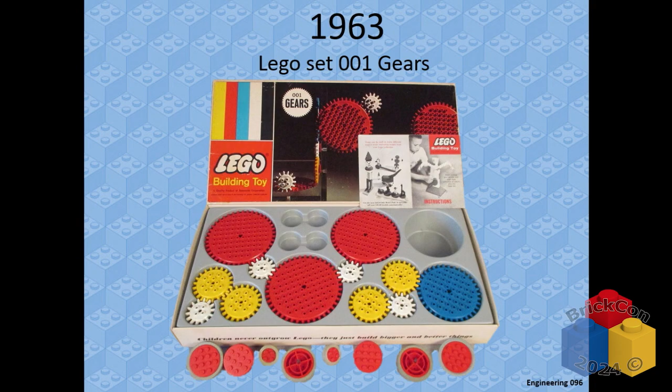So this is low-level engineering stuff, real quick. Gears have been around in Lego form since '63—the big sprocket ones, those are kind of fun. And in '77, that's when Lego came out with what we now call Technic. That's when we got the 8-tooth, the 24-tooth, and the 40-tooth gear. More on those later, but they've been around since the '70s, okay?

Some of you have been around since the '70s. Yes, there we go, excellent. So I do remember when these kinds of things came out when I was a kid, and that was kind of cool.

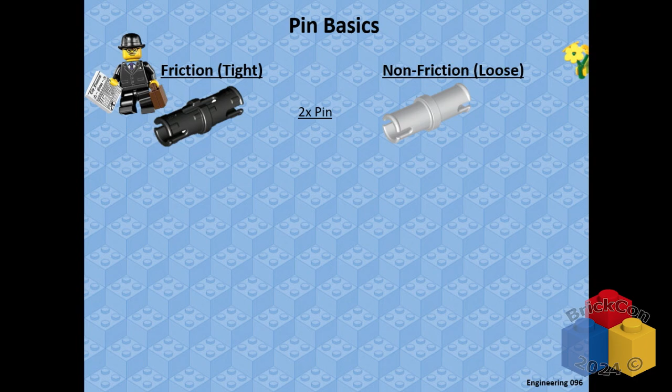So pin basics, real simple. If Technic is not your area, there's friction pins—they're a little bit tight-wound. And there's the non-friction pins, which are really kind of loosey-goosey. They are different, I didn't learn this till I was in my 40s. I always thought they were the same, just different colors. Working with gears, the ones that are a little bit more helpful are the combination pins.

Where it's half axle, half pin—sometimes you need to connect a gear to something, but only to the Technic beam or something. So the non-friction tan ones are very convenient for that because they spin nice and loose. Sometimes you need to introduce a little more resistance in a mechanism, and the blue ones can be nice because they will still attach to the gear, go into the pins or the beams with the pin connection, and have a little bit of resistance and friction. Just a little tip there.

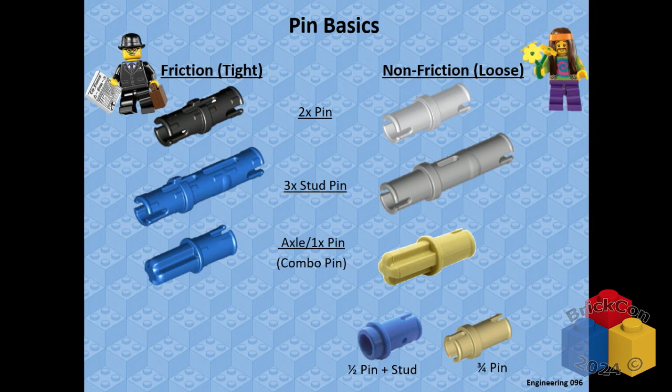There's more pin types if you don't know them, even more than this, but basically think friction and non-friction. The friction ones are all black and blue, the non-friction ones are all tan and gray. They also have red and yellow that they're introducing now, which is frustrating because I learned these colors—but they do still follow the friction, non-friction rule.

In general, simple machines—this is the core alphabet of all mechanical engineering. If you don't know these 6 simple machines, find a resource to help understand them; great YouTube videos and tutorials out there, lots of fun stuff. This is great for understanding how machines work. The basic concept is changing the magnitude or direction of a force—make something go a different way, or at a different speed or force. There's lots of math you can do with these things.

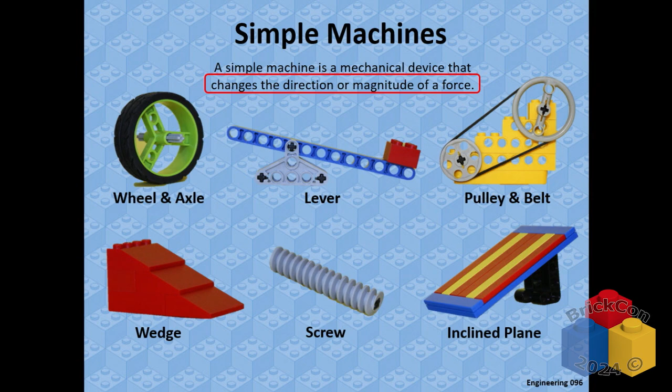That's not why we're here, so we're going to just focus on the fact that they're cute little things and they do stuff. So, simple machines—get to know them, maybe that's a talk for another day. Any kind of simple machines combined together make a more complex machine, like a gear. A gear is not a simple machine, it's more complex—it's got more functions in it, and we're going to use those to do stuff.

You just passed 096. On to 101.

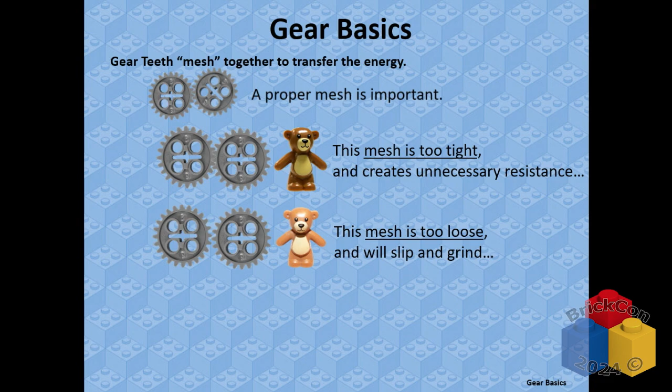Gear basics, just learning about gears. You never touched them before, you don't know what they are, you find them in the bulk bins, you're like, it's weird. Got to have a proper mesh. When they mesh together, the teeth of the gears really need to fit properly.

Can't tell you how much I see with, do you not fit properly sometimes? Does it not mesh right for you sometimes? Okay, I'm sorry, that's a personal issue. We'll talk about that later.

It's okay. So make sure they're not too tight, make sure they're not too loose. They got to fit just right. That's kind of cool.

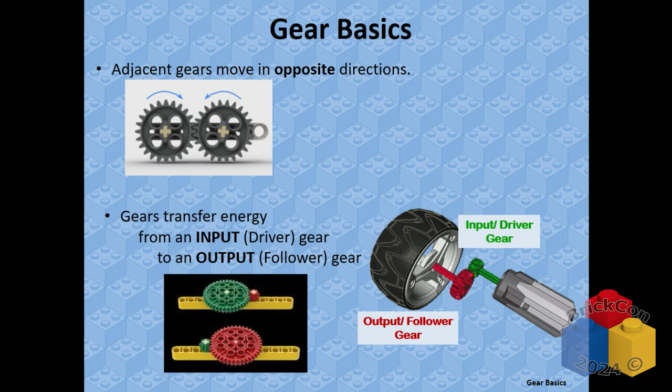Two gears working together turn in opposite directions. It seems pretty logical, but sometimes we forget that. You build a thing, you hook it up, you turn it on, and it's like, why is it going backwards? Well, because you got two gears. Maybe make the first one go the other way, and the other one will go the other way.

Gears always have an input gear or a driver gear. That's where the thing is going in, you're starting the force there. It connects to an output gear where it's going off to do something else. Input and output, first, second, driver gear and follower gear. Different terms, but input, output. Easy enough, I hope.

Gear basics. Any time you want to put a gear between gears, you can do that. You still have an input, you still have an output, but you can put some gears between them if you need to space them farther apart. Those are called idler gears. The idler gears space things out. One idler gear will reverse the direction, so now the input and output will go the same direction. But if you put two idler gears, now they're going to go back to opposite directions again. You can put a whole bunch of idler gears together and it creates a gear train.

Using smaller idler gears can create some resistance and friction. Using larger ones gets you farther spacing and makes it a little bit smoother. Depends on the machine you're working with, but idler gears can be your friend to move things farther apart. Idler gears do not affect gear ratios, which we'll talk about shortly. Don't freak out on that word you heard back in middle school. They do not affect the gear ratio, just the input and the output.

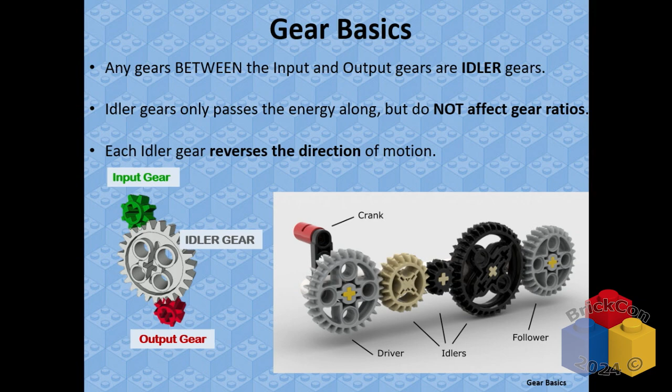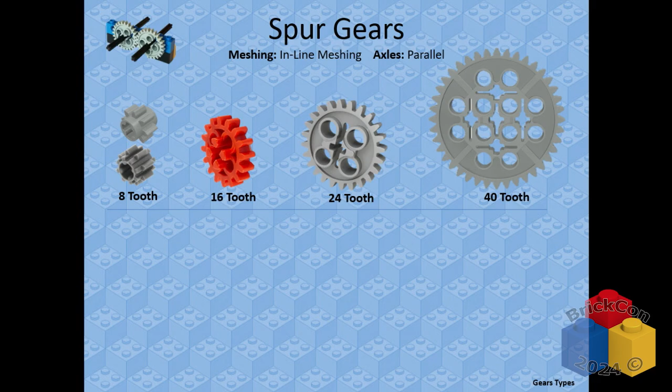On to gear types, gear pairings. I'm going to go through this quick, and then we're going to get to the more meaty stuff, hopefully. If you're using gears and you want the axles to be in parallel with each other, you got gears that are just meshing side by side, sitting right there. That's an easy one. They're called spur gears, you know, spurs like a cowboy. Yeehaw, giddy up, little cowboy. You got an 8-tooth, 16-tooth, 24-tooth, 40-tooth. That's it, those are your spur gears. Seem easy? Freak anybody out yet?

You don't even want to answer because you're freaked out. Okay, so I'll just move on.

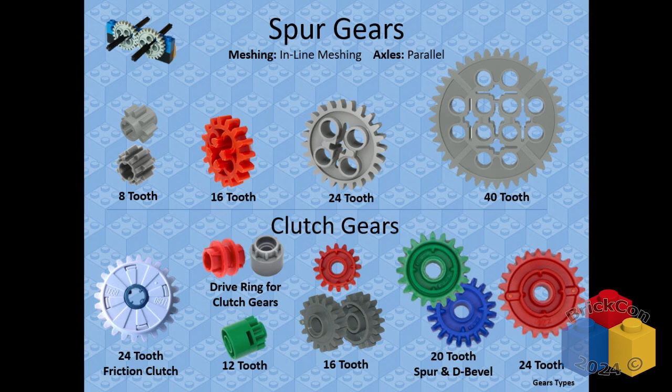So clutch gears are kind of cool. The white one on the end is an older one, but still's out there. The center axle hole can move independent of the outside. So if you put an axle in the middle, connect a gear to it, there's enough resistance in there that it will turn. But if one side, the inside or the outside, jams up or slows down or encounters too much resistance, the center one can spin independent of the outside one, so it slips like a clutch. That's why they're called clutch gears.

All of the other ones up here are more for transmission drives, like in some of the really fancy Technic cars and things. You actually want to do a gear transmission where you might have one gear spinning constantly, and then you want to take this other gear, move it over and engage it to make it start turning, or shift it to another gear that engages with it and starts moving. So clutch gears, good for moving and making transmissions.

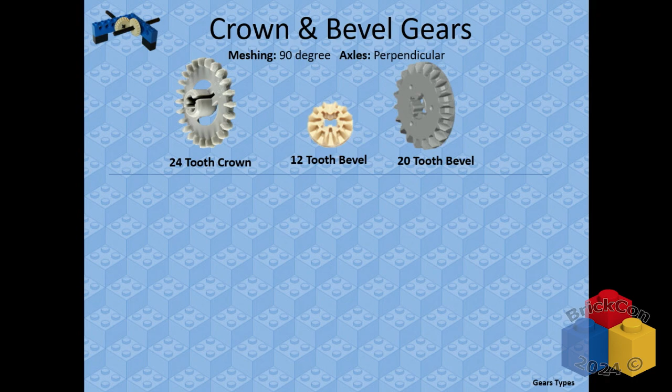Changing axle direction, going perpendicular. Maybe your motor is connected to something this way, but you want something to go in a different direction over there. We can do that with a different type of gear that'll change directions: crown gears, beveled gears, to change axle directions and make perpendicular axles, like going around a corner.

My friend Kyle Keller showed me that you can even put them on a 45-degree angle. It gets really weird. It's really cool, but it's kind of challenging.

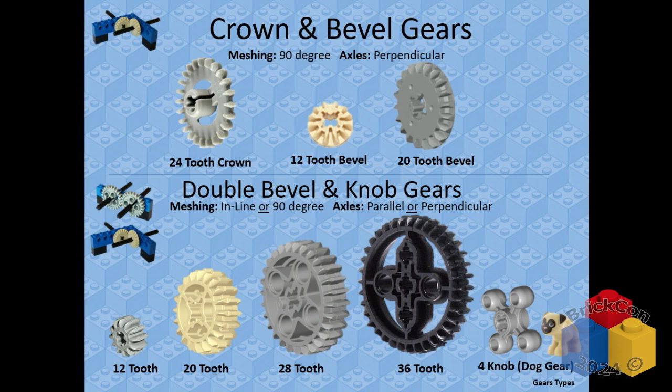The little wheel one at the end, the knob gear or dog gear, does the same kind of thing: inline or 90-degree meshing. So there's all the basic gears, with gear sizes right there. There are 8 different sizes of gears across 3 different types. Pretty straightforward.

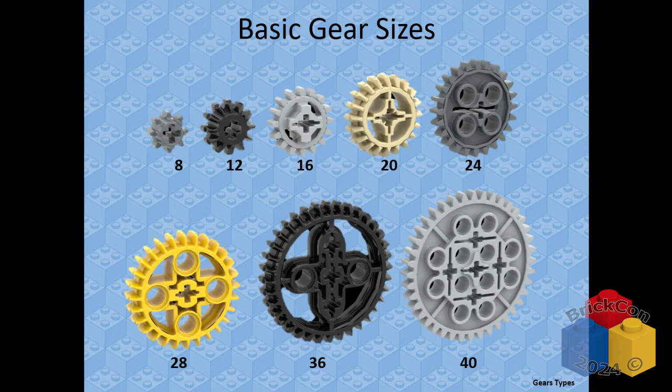Do you remember those all? No, I don't remember. It took me like 3 years to start remembering the numbers and things. If you don't remember the numbers, don't worry about it. There are resources to figure it out, or you can just sit there and count each tooth on a gear. It's pretty easy, pretty cool. But knowing the numbers eventually helps you do more advanced functionality with it.

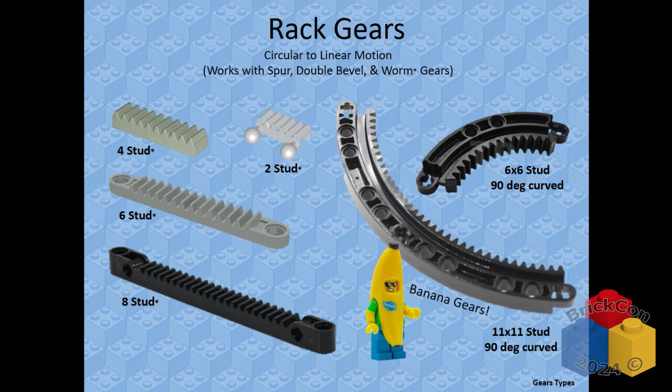Rack gears are a different type of gear. They're not round, they're linear - flat and straight. Good for going in a straight line, making linear motion. You can take a round gear, connect it to a linear gear, and go back and forth.

The banana gears, the big curved gears, are totally cool. You can make a complete circle, or use them as a quarter circle, half circle, or three-quarter circle. But they're curved on the inside - a little bit different there.

The worm gear is one of my favorite gears. It's a one-tooth gear - all it's got is one tooth. But it's really great for slowing things down and giving a lot of torque, which we'll talk about shortly.

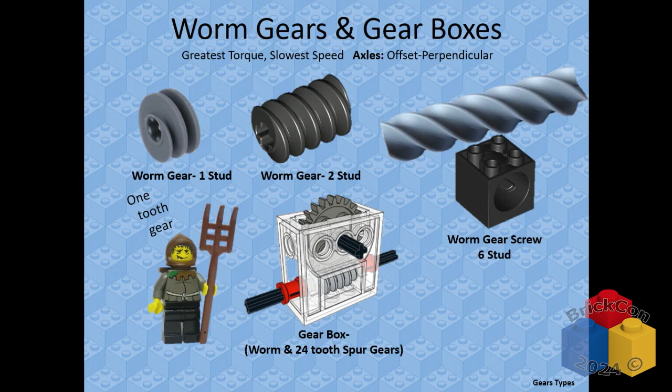There's this little clear gearbox, which comes in other colors, that works with the worm gear and the 24-tooth spur gear - it just fits in there and works. You can use Lego pieces of other types to make that same connection so the gears work together, or there's just a piece that does it for you. Both are okay, no judgment there. And they're still available.

Differentials come in all shapes and sizes through the era. If you're doing like a car with a transmission and you want the back wheels to turn faster than the other, a differential is your friend. But it could be used in other mechanical things as well. It's a much more advanced engineering topic that I don't want to get into today, but I want you to know what's out there.

The turntables - the inside spins separate from the outside. That's pretty easy, and you can hook a gear to those to make them go.

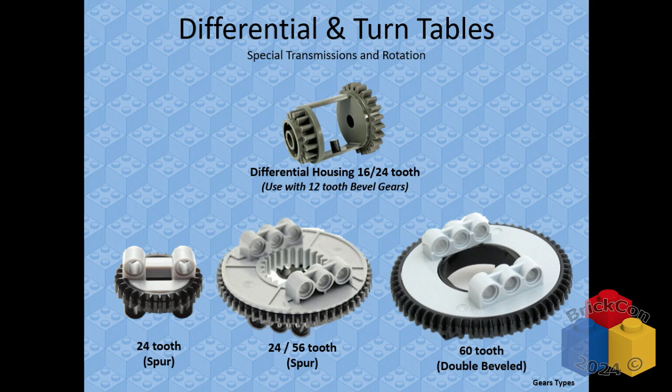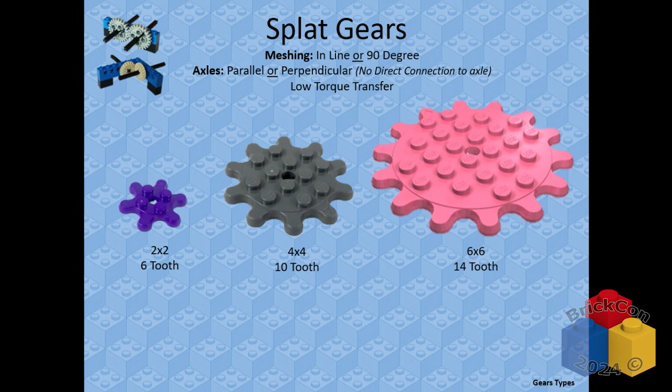Easy, right? No? Okay, good. So if you want to hook them together and make them work, there are certain ones that work together and certain ones that don't.

If you want to use any of the spur gears, all the spur gears work together, but they also work with the crown gear and the double bevel gears and the rack gears. Okay, easy enough, little Venn diagram. Does that visually work? Good, okay, good.

Somebody nodded. If you want to use the double bevel gears, all the double bevel gears work together. Very cool. But you can also use the regular bevel gears, and you can use the crown gears, and you can use the spur gears, and you can use the rack gears. Okay, that's kind of cool.

If you want to use the worm gear, it has to be the input gear, it cannot be the output gear. It's a one-direction connection. You drive the worm gear with like a motor or something, and then it makes another gear move, but you can't go the other way. You can't turn this 40-tooth gear and make the worm gear go. It won't work. Just mechanically, it doesn't work that way. So worm gears, one direction only.

And they only work with these guys. They don't work with the banana gears, even though they're in my circle. I don't know, I got lazy. I didn't want too many circles. So don't use them with the banana gears. It's curved and the thing's not, and it gets really funky and weird. Okay? And of course, the knob gears and the splat gears, they work together as well also.

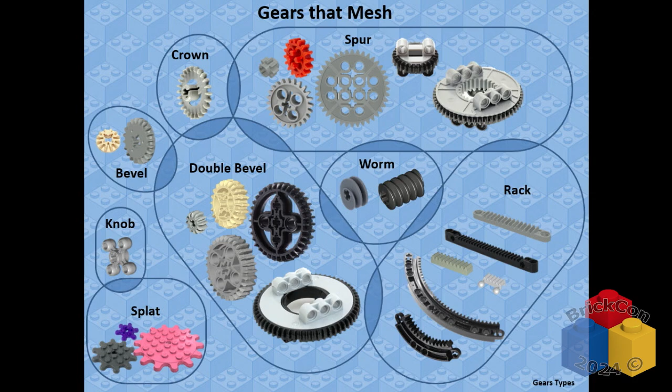All right, so that's gears. Speed versus torque. Does that scare anybody? Some people say no, some people say yes, okay good. So speed is obviously something moving at a quick rate. Torque is a twisting force. If you reach out and grab a doorknob and twist, that's a twisting force, okay?

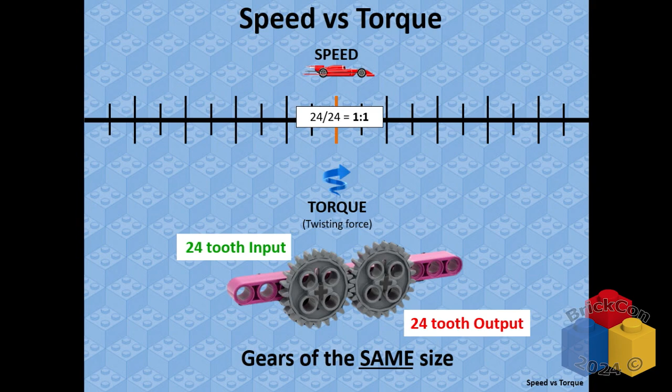Something that twists, how much twisting force is there in there? That's torque. So if we have two gears working in a simple system here, and the two gears happen to be the same size, like these two 24-tooth gears. Got a 24-tooth gear input, got a 24-tooth gear output. Okay, so every time the input gear turns one time in a circle, how many teeth went around that circle? 24, for the half of you that understood that.

That's good. And that means that it's going to push on the output gear how many teeth? 24. So it has 24, so it's also going to go in a circle one time. So they're going to turn around a circle at the same time, at the same speed, with the same amount of torque. It's a balanced system. If it was an 8-tooth gear to an 8-tooth gear, they would both turn at the same speed with the same torque. 40-tooth gears would turn at the same speed, at the same rate, at the same torque. Same size, same input, same output, same speed, same torque.

But the beauty of the gears is when we change one of them. So if the input gear is a little bit bigger, like a 40-tooth, and the output gear is still a 24-tooth, the input gear is going to turn, 40 teeth go around. How many teeth does it have to push on the output? 40 teeth have to be moved, but there's only 24 teeth there. So it has to go around and it has to go a little bit more. It's like, okay, hold on, I gotta catch up to you. Hold on, 40 tooth gear, I'm not there yet. So it's gotta go a little bit faster.

When that happens, speed and torque are inverse opposites. So if speed goes up, torque goes down by the same inverse amount. If the other goes up, the other goes down. So they're gonna move at the same rate. So we're gonna gain a little bit of speed, but we're gonna lose a little bit of that torque. That make sense, everybody? Okay good. I did something right. Coolness.

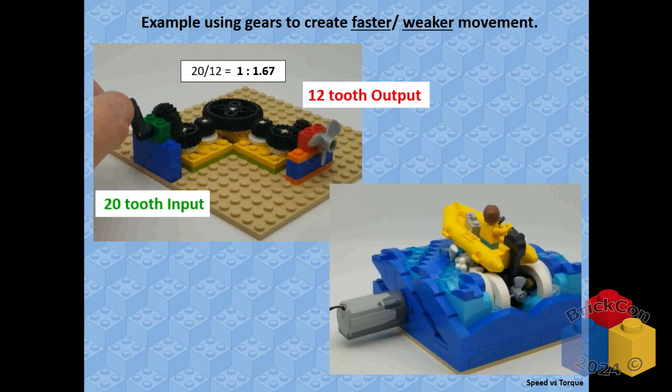Okay, so here's an example. You probably saw this down there. My little speedboat. I wanted a speedboat, so it had a really fast propeller. So I have an input gear hooked up to a motor down in the hull. 20 tooth input gear, and a whole bunch of idler gears. A lot of idler gears.

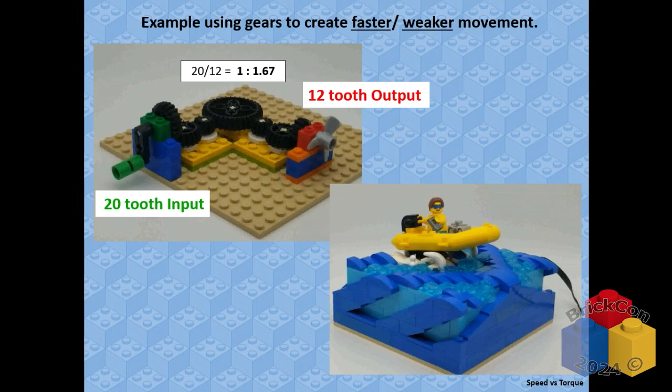How do I factor in the ratio of the idler gears? It doesn't matter, you ignore them. You ignore every single idler gear. You look at the input gear, the first one, and then you look at the output gear at the end. Because every time that input gear turns and pushes 1 tooth, the next idler gear pushes 1 tooth, and the next, all the way to the end. And the size of the final one, the output, that determines your gear ratio. Input, output. Ignore the rest.

They don't matter. So here we got a little bit of a gear ratio to increase the speed, to make it go a little faster.

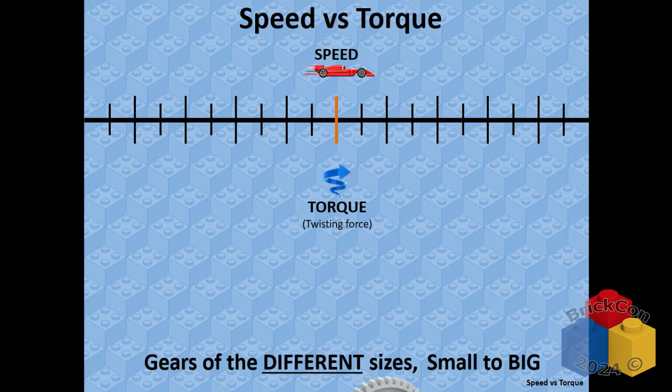So, but what if we change it the other way? We're like, I like that, Brandon, but I don't want that, I want the other thing. Okay, so we can go smaller gear pushing a bigger gear. Same concept, just in the other direction, because inverse opposites go the other way. So now I can get less speed because I want to slow it down. I don't want it to go fast, I want it to go slow.

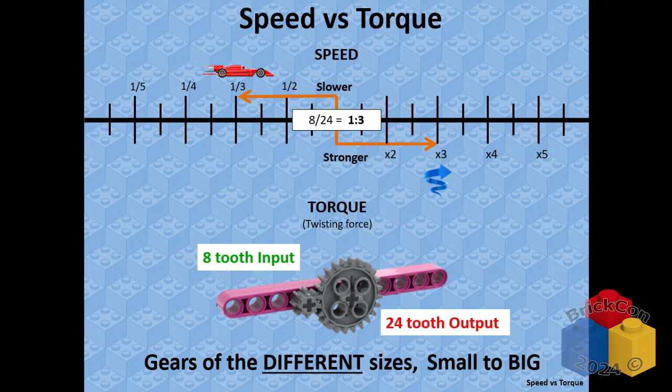We can do that. Okay, it's going to have a lot more torque, though. And if we go from an 8 tooth to a 24 tooth, okay, I got 3 times the torque. A lot more power. A lot slower, though. Okay, that could be cool.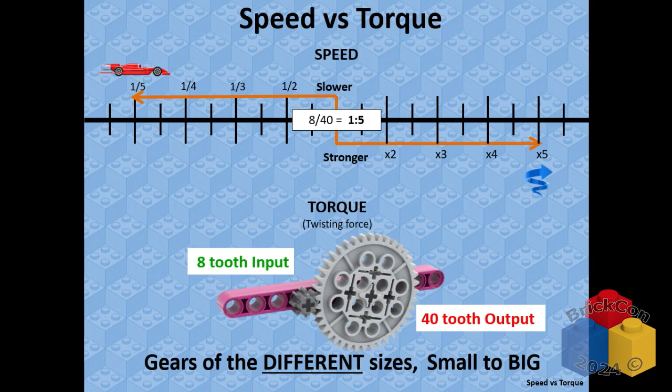And if I want to go from an 8 to a 40, then I've got - it's math. Do you see how the math is kind of working there? Remember, it's ratios, they taught you ratios at one point in school. I'm sure they did. So we get 1/5 of the speed, but 5 times the torque. Maybe you want to lift a big bridge or move a big thing. Okay, maybe you need a lot of torque. That's kind of cool.

How does that feel for everybody? Not too bad? Some people are like, and some people are like, what? I need to take this class again. Hopefully it'll be available for recording later.

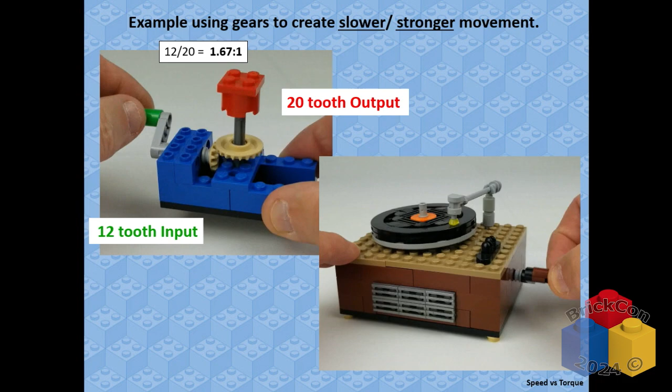So, example of gearing something to go slower. Slower but stronger. Here I've got a 12 tooth input, 20 tooth output. So it's not a lot of change, 1.67, it's not too bad, but it gives me a little bit of difference there.

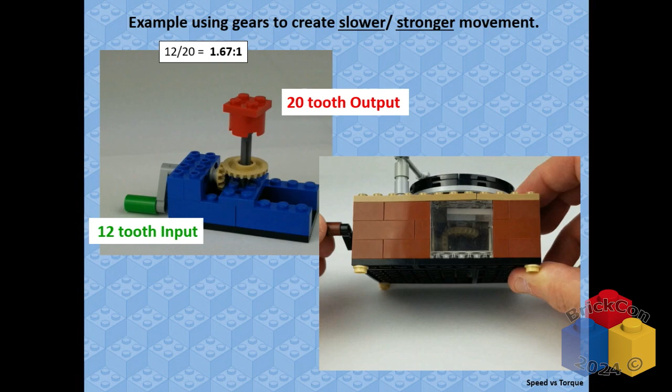And there's my little record player. Who saw the record player down there? Oh, somebody saw my stuff. I'm so honored. It's so cool, so cool. All right, let's move on.

Now, here's a bunch of gear ratios. That's kind of a lot of information. This is online, you can find this, I'll show you where to get it here in a bit. But if you took an input gear of an 8 tooth and an output gear of a 24 tooth - input is green, output is red - and you cross-reference them, you get a 3-to-1 ratio. Okay, that's cool. If you go the other way, you're like, well what if I want the 24 as the input, the 8 as the output? 1-to-3 ratio. Just a matter of whether you're getting speed or torque.

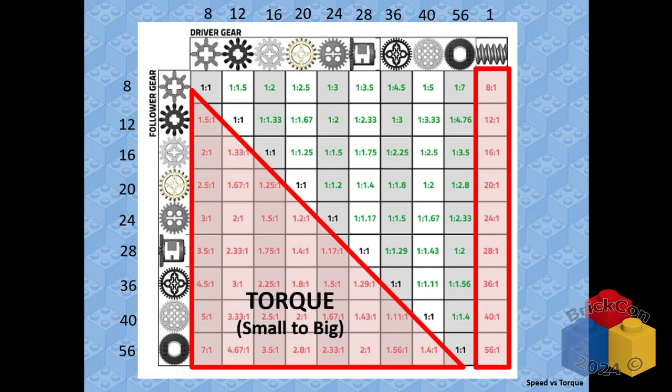If you use the same size gears, what happens? Same, 1-to-1 ratio, so long as they're both the same. Okay, but you can figure things out and do speed, or you can do torque. And worm gears have to be which gear? Input. Got to be - you guys are good at this, I love it. Okay, all right.

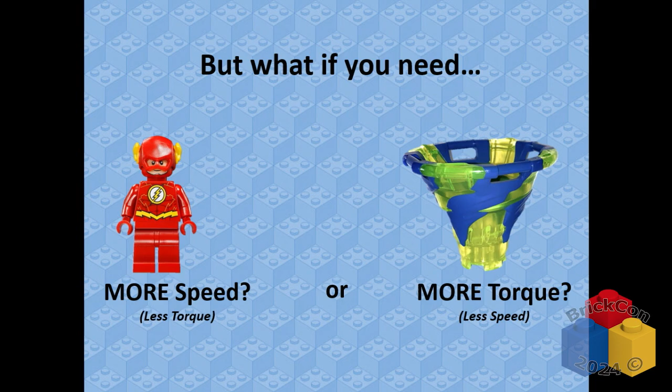But what if - more speed or more torque? Tornado of creation there, for those of you Ninjago fans. Kind of, not really, I just figured it was something. So when you do compound gearing, who's ever done compound gearing before? Okay, you guys are good to go. No.

Okay. So compound gearing, not too complex, but it's like it sounds, compounding. We're going to do it. So we're going to do an 8 to a 40. Does that feel kind of comfortable now? And we get a 5 to 1, so we're going to get a little bit more torque. And we're going to go a lot slower. Really slowing this thing down by 1/5. Okay. You can say 5 times slower or 1/5.

I don't care. Okay. But then on that output axle, the same axle that your output is at, you're going to add another gear. And that's going to become a new input gear. And that's going to go to a new output gear, which gives you another 5 to 1 ratio. That's kind of cool. But the total, the combined from the first input to the last output is not just 5 to 1.

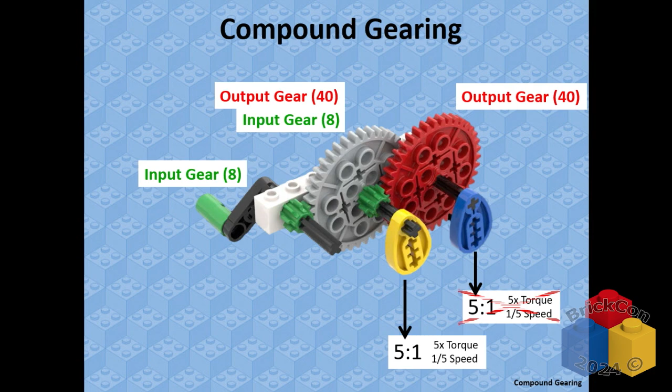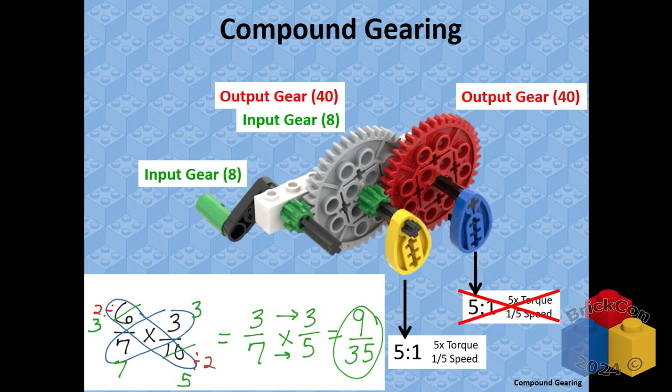You've got to do some really great, they taught you this, right? How to take two things and divide and then cross over and do this and then divide by the opposites, and then you remember that? Do you remember they showed you that? Yeah. It's 5 times 5 is really what it is. So 5 times 5, we get a 25 to 1 ratio.

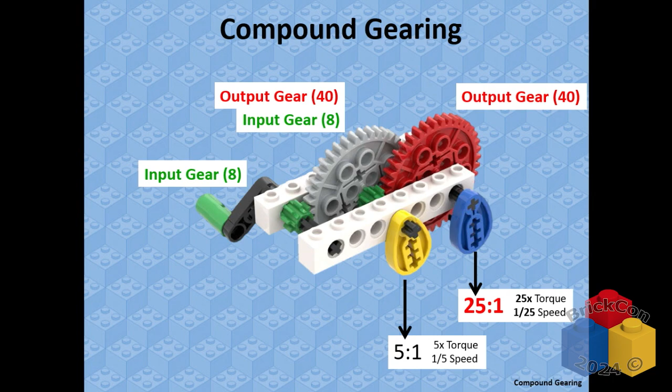So I did it once, I did it twice, I compounded it. I now have something that's going to go 1/25th the speed, or 25 times slower. It's going to be very, very slow, but it's 25 times stronger than whatever my input was. That's a lot more torque. You can start twisting axles at this. I've done that. I've taken axles and twisted them 180 degrees against themselves. And they're really cool, but not fun for the MOC, I tell you that.

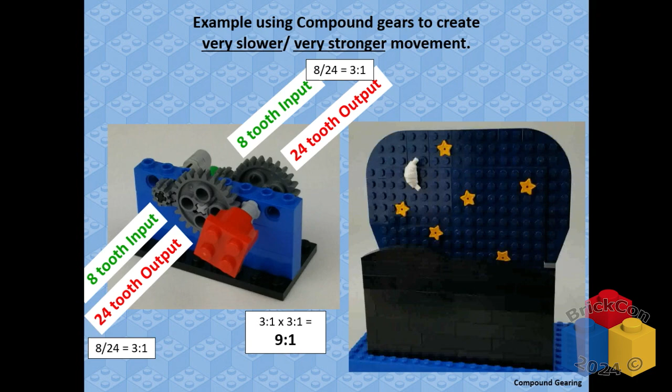Okay? So here's one where I did compound gearing, the little shooting star thing. Maybe you saw this down there. It's got an 8 to a 24, and then another 8 to another 24. So I got a 3 to 1 and a 3 to 1, 3 times 3, 9. Okay, just move over this way. We'll just...

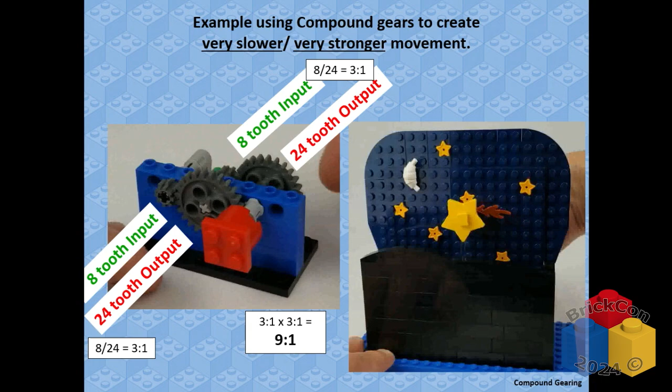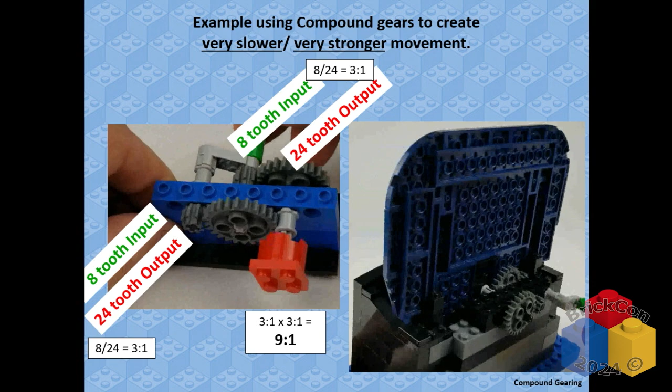Okay, so I get nice slow motion, really slow. Do I need a lot of torque here? It's a really light thing. There's almost no resistance to it. I don't need the torque, but I wanted it slow. I was able to slow it way down and give me the speed I wanted. And if it was not the right speed, I could change some of the gears around and combine them differently and get different stuff. Okay?

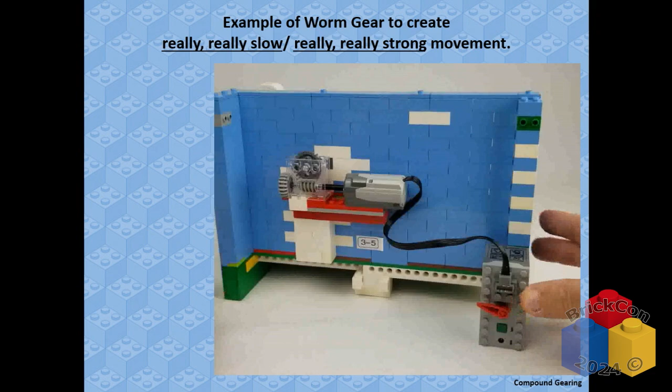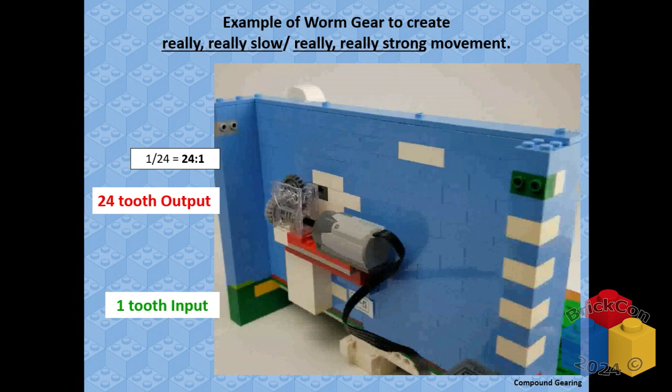This one uses the worm gear. And so you got a motor going into a gearbox. There's a worm gear at the bottom. There's a gear on the end. Ignore that one. That one's just there for manual control, so I can force it if I needed to align it. But a 1-tooth gear to a 24-tooth gear, 24 to 1 gear ratio. Interesting. Okay. So it's going at 1/24th the speed with just 2 gears. The other way I compounded it, I was able to get 5 times 5, 25, 1/25th, or I can get a 24th. Kind of a different way to do that.

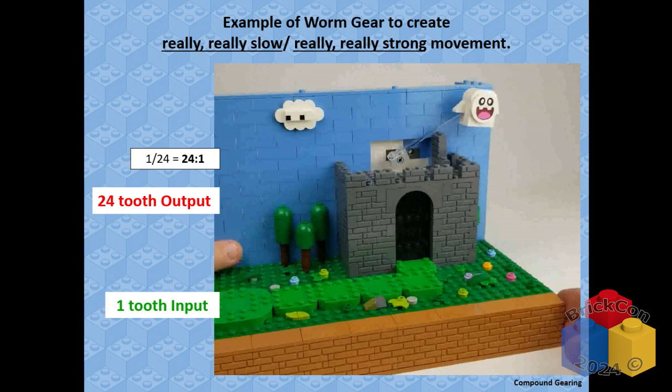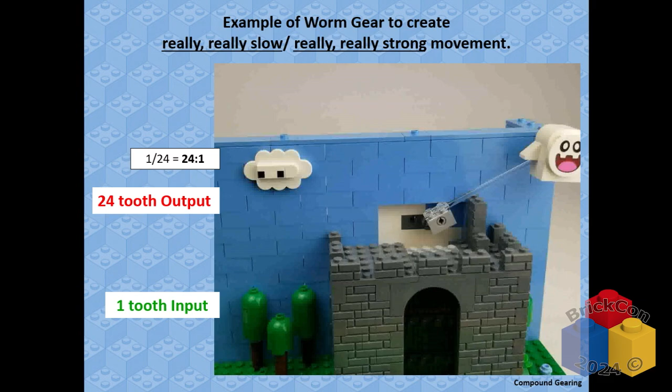And then on the output axle, I just put a little offset beam and attached a pin to it. So that pin in the 1x2 brick is going around a circle, correct? But it's going around the outside of a circle. Going around the outside of a circle is eccentric or off-center motion. So I've got off-center motion, and I just attached a little beam to it, and it's just hanging out there and resting on a thing.

Oh, I'm sorry. They didn't like my talk. That's okay. Get out of here. No. See you next year.

Yeah. So got a fun little motion there. Does that make sense? Okay, cool.

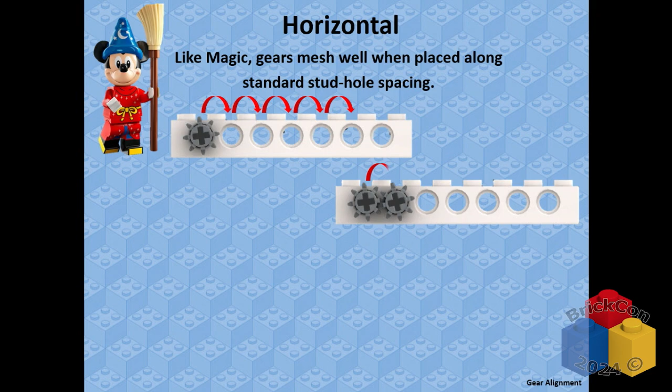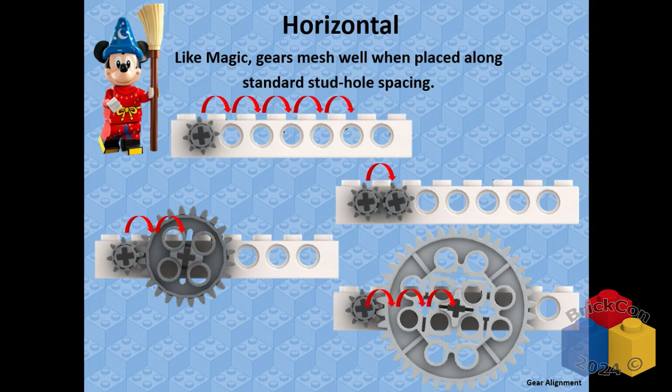Gear alignments. So when you take gears and you put them in those little holes, you familiar with those little holes? Most of you, some of you. Okay, good. Technic. Okay, so they fit in there with axles or pins or whatever we talked about. Okay, and they go next to each other, and the teeth magically mesh in the right alignment, right? Every time. But sometimes they don't mesh. Sometimes they're off by half, and you can't just move it over. You move it over one hole, it's too close. Move it over the other hole, it's too far away. They don't touch. They're cursed.

But we have a way to fix that. Lego's like, dun, dun, dun, dun. We have things that have holes that are halfway offset or aligned with the studs instead of between the studs. Okay? We can do that with bricks. We can do that with Technic pieces. We can move over by half to make up that little bit of difference. Kind of cool.

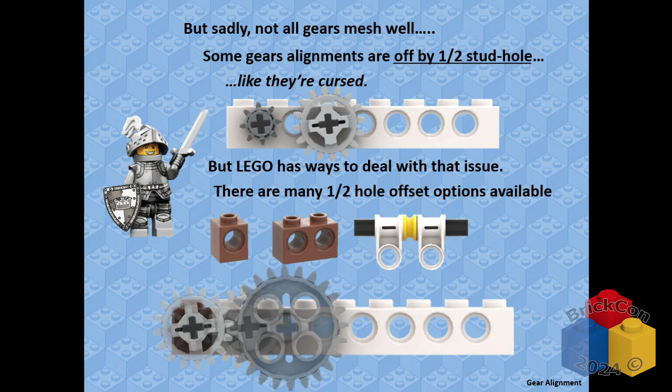So there we go. Now we have good meshing. We can do different sizes. Kind of cool. Anybody encountered that before where you had to move something over a little bit? Oh, yeah, we know we have. That's good. Okay, that's cool. So to help you with that, there's this easy-to-reference chart, right?

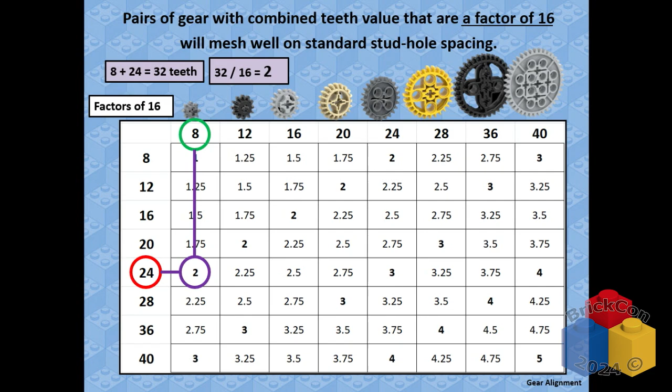Okay, so if you take an input gear and an output gear and you add together the number of teeth, and then you find out how many multiples of 16 that is, well, 8 and 24, that's 32. That's a multiple of 2 16s. That means you need to move over just one extra hole or 2 holes apart. So anything that's a solid multiple of 16s, they just fit. 16, 32, 48, all the way up. They just fit. Kind of easy.

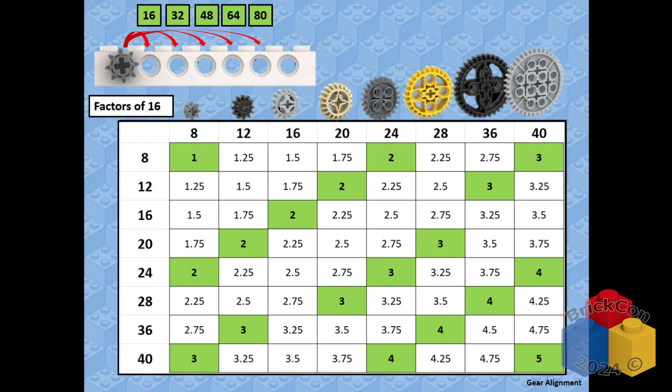Nobody likes to build this way, though. Nobody's digging in your bin and going, oh, let's see, I need to find me a multiple of 16 pair of gears over here so it'll fit into my axle. Oh, yeah, these two. This is a multiple of 16. I know how to work with this. But it's helpful if you start to do some of the calculations. You're like, why doesn't it fit? Okay, we can figure that out, and I'll help you with that.

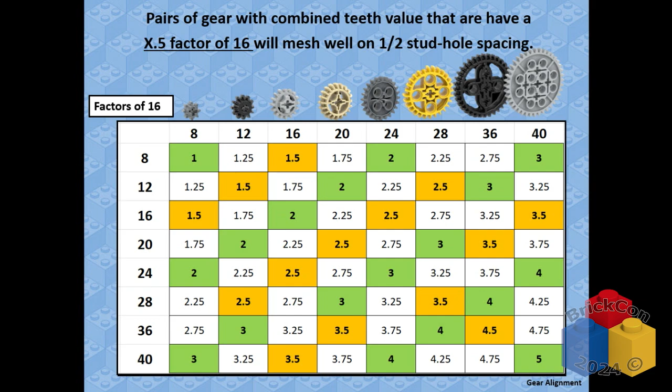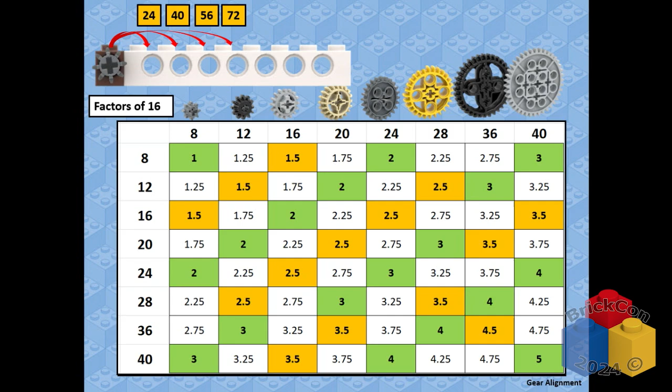Now, if you do your factors and you figure out it's a half of a factor of 16. It's not quite a full factor, but it's a half factor. Okay, then it's going to be off by one of those half measurements. Got to move over half a stud. So not too far, 24, 40, 56, 72. If your teeth add up to those numbers, you're going to be a half. Is that confusing? Good. Okay, don't worry too much about it.

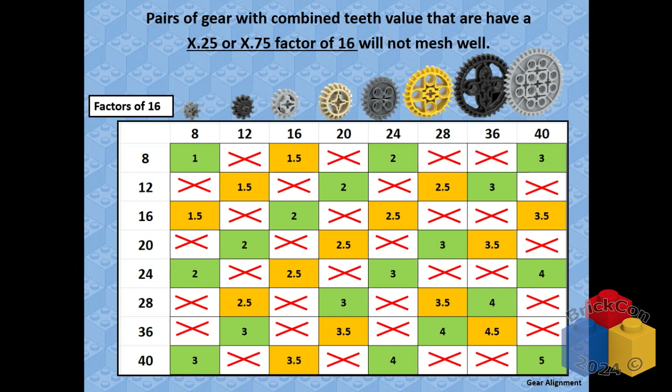But if you do the numbers and you add them all up and it comes out as a quarter or a 3/4 of a factor of 16, those don't mesh. Just don't even try. There's some ways it can be done, but don't hurt yourself unless you're really comfortable with it, okay? So this little chart right here, I'll leave that out so you can take a picture of that if you would like. Or I can email it to you, okay?

If you're going vertically, just taking Technic bricks and stacking them on top of each other does not equal the same as it goes horizontally. Those don't mesh. Don't do that.

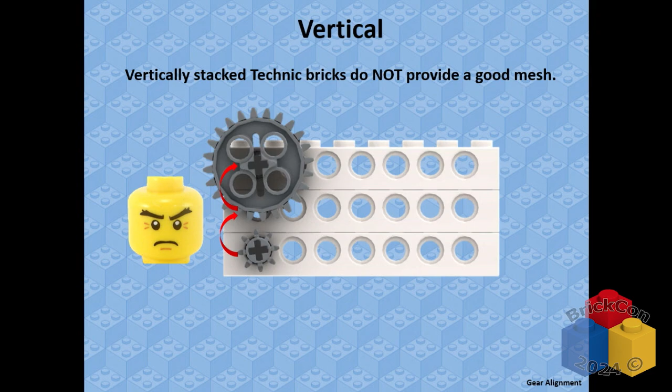I will hunt you down. Okay. Not really. Sorry, edit that out. Okay, thank you. Cool. Okay.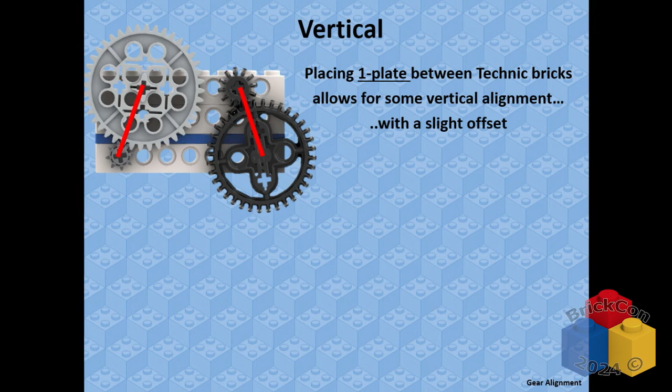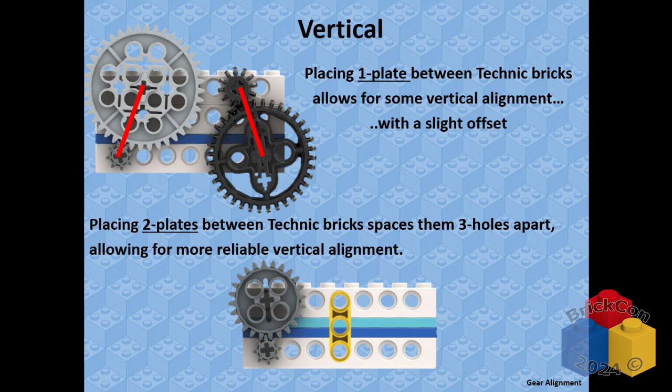But if you add one plate, you can get meshing where the gears are offset by 1 hole or sometimes 2 holes, off to one side. Okay, so 1 plate, that's kind of helpful. Certain gears will fit that way, certain gears won't. But if you had 2 plates between 2 Technic beams, the holes are 3 holes apart, which means it is now back onto standard spacing, which is a really nice technique. And you just get regular meshing. You can't mesh in that middle hole because there's 2 plates there. I don't know who stuck them there, but they're in your way. Okay?

So whatever you want to do with any of your gears, do remember proper meshing is important. There's a lot of other resources out there that can show you some different combinations and different techniques, but generally start there. Go horizontally, great. If you go vertically, recognize it's going to be a little bit trickier. Might have to add a plate or 2, offset them to the side. They can fit. If you put them together and they're too tight, is that good? No. If they're too loose, no. Just right. Make that happen. Sound good? Okay, good. Nobody's learned anything yet. I'm feeling kind of bad.

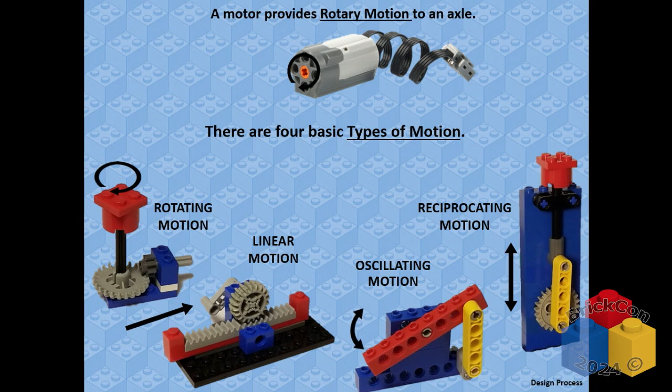Okay, design process. Somebody asked me about this, so I thought I'll throw it in here. So how do I do this stuff? Well, we know that motors, assuming you're using a motor or a hand crank or some sort of an input device, is a circular motion. In this type of engineering, we've got 4 types of motion that you can deal with. You can have more circular motion, but somewhere else. My motor's over here, but I want it over there, but I still want it to be going around. Maybe it's faster, maybe it's slower, maybe it's the other direction. Okay, I want other rotary motion. I want something to go in a straight line.

Okay, I just want linear motion. Go that way. Okay, we can figure that out. I want oscillating motion, swinging back and forth from a fixed point. You're swinging on an arc and you got a fixed point. Okay, that's oscillating motion. Or going forward and back in a straight line, reciprocating motion.

If you're going to build something, think about what you want it to do. Know your type of motion. I want something that's go up and down, back and forth, swing this way, do that way. Know your type of motion. That's where you want to start. Okay? Maybe you want to know what it is. Is it a fish? Is it an alien? Is it a car? But what kind of motion is it going to go for?

Okay? Then, how are you going to get the energy or the motion from your motor or your input to where you want it to go? Well, you got to move the energy from one place to another place. So we got 5 different drive type options in the Lego world. Well, there's pneumatics, but I ain't doing pneumatics right now. You put that on the list, I'll do a talk on pneumatics.

So direct drive, just stick it on the motor and make it spin. Well, we're doing gears, and that doesn't really require a gear because it's just going to spin. Okay, that's just direct. That's easy. But you can use gears. We just talked about that. You remember? We talked about that, using gears to connect together and mesh? No. Wow, okay. Or gears that go around a corner or 90 degrees, they mesh, and you change direction. You still don't remember that. Oh, my God.

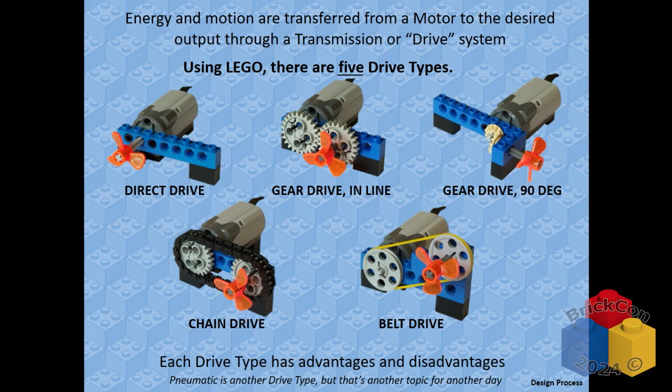Okay? Or belt drive, it's kind of the same thing, but it's a little more elastic, it's a little more loose, a little more flexible. You do some different stuff with that sort of a drive system. Okay? So different drive. Know how you're going to get the energy from one place to another. That's your drive.

So design engineering process. This is something I teach in all my classes. This is something engineers and architects all over the world use. There's different levels of it, but I broke it down to this. Identify the problem, brainstorm. No, you can read them. I don't have to read them to you. I hate that. People do that on PowerPoints. Right? I may read to you what's on the slide, exactly word for word, so you understand it like I understand it. And you can read it for yourself. You're not that slow. Well, some of you, but okay.

But identifying the problem. What's the limitations? What am I trying to achieve? What's my goal? Okay, that's cool. Maybe what are my constraints? I only have these pieces. Okay, that's part of identifying the problem. I don't have any motors, or I only have this type of motor. Okay? It can only be this big, maybe doing a build challenge. That's part of your problem. I want to make it do this. That's part of your problem. Brainstorm ideas. How are you going to come about it? Design it and plan it, et cetera. Okay? So let's walk through this.

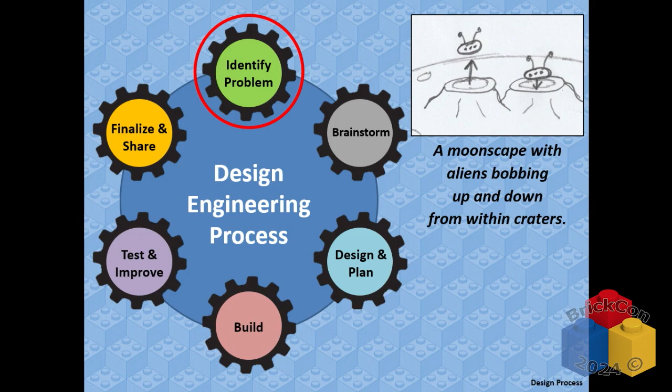Identify the problem. Great. I want some sort of a moonscape that has aliens bobbing up and down out of some craters. Okay? That's my identify my problem. Sound doable? Sounds kind of cool to add to a MOC somewhere, maybe? Like down in the hall, like I have already. Okay, I'll get there.

All right, I'm going to brainstorm some ideas. How can I do this? What's the scale? How big is this thing going to be? Well, I want it pretty small. So I'm going to make my craters maybe 2 by 2, and my aliens are going to fit within that, so they're going to be probably a 1 by 1. Maybe even a Lego head size. That would fit in a 2 by 2 circle. Okay, so that's the size of my crater. That's my scale.

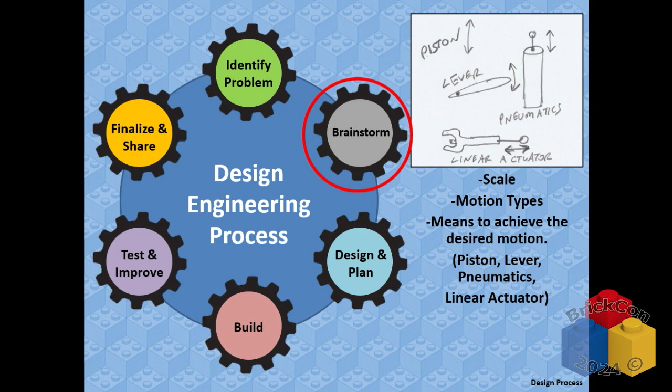What are my motion types? How can I make this thing move? Well, I could use pistons. I could use pneumatics. It would go up. It would go down. That'd be cool. I could use a lever mechanism. It would be oscillating, but maybe the alien kind of comes out in an arc. That could be kind of cool. I could use a linear actuator. Those are cool. I have a few of those stashed away somewhere. If you don't know what that is, Google it. It's a cool piece.

Okay, so I got some ideas. I brainstormed. When you're brainstorming, come up with more than one idea. Don't go, this is what I want, and this is how I'm going to do it. Come up with some ideas. Well, I could do it this way, I could do it that way, I could do it this way. Brainstorm. Think of some idea.

Talk to your friends. Some of you have those. Talk to your AFOLs here at the conventions, at your lugs. Hey, I am thinking about doing this thing, do you have any ideas? Talk to Wayne. If you have an idea about how to do something like that, Wayne will engineer the whole thing for you. He's beautiful.

Okay, so brainstorm some ideas, then make a design plan. Sketch it out if you like sketching, build it in Stud.io, or do it with chewing gum and popsicle sticks, whatever you like. But make some kind of a plan so you know what you're doing. If you just do it all in your head, that can work, but an engineering process is more about the process, so you can go back and reference that and make changes later if you want to.

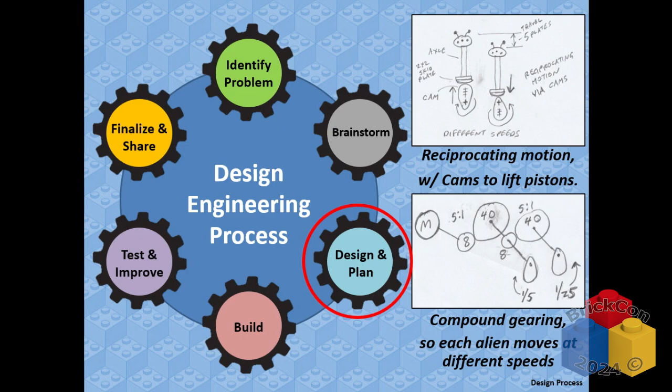So here I figured out I'm going to use some reciprocating motion and some cams. I'm going to have something that turns with a cam on it that pushes something up and down, a piston that makes my aliens bob up and down. I want them to go pretty slow, but at different speeds, one kind of fast and one bobbing more slowly. So I'm going to use some compound gearing, with one alien on the 1 to 5 and one alien on the 1 to 25, so it'll be different speeds.

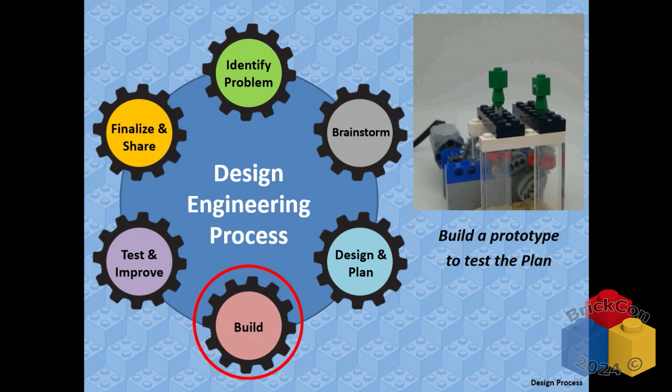And build a little prototype, test it out. This is what I came up with. Here we go. How's that look? What do you notice about it? Maybe you can't see it because it's too small. They're turning around. Every time the piston comes up and pushes, on the bottom I have a 2 by 2 round skid plate, it pushes and causes it to rotate a little bit. So it's not just going up and down, it's like woohoo, woohoo, woohoo, woohoo.

And I didn't want that. Maybe you like that kind of a thing, but it's not my jam. So, you know, for you, we'll hook up later. All right, that's good, that's good.

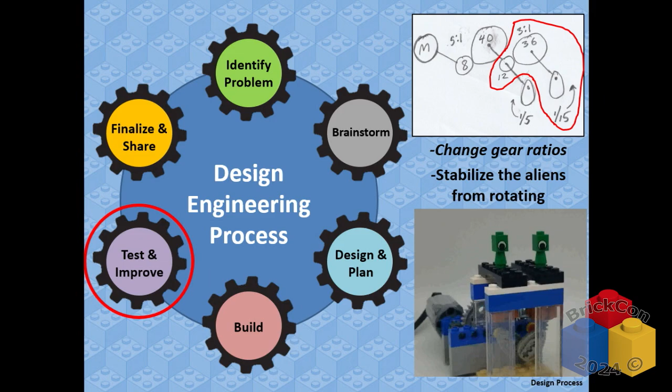So I tested and I improved. I changed it. I put in some bricks and solid walls so it can't rotate. And I changed from the skid plates to just a little 2x2 brick with a Technic hole in it that could go on the axle, so now it doesn't rotate. And I decided I'm changing the gearing on the second compounding. It was too slow, the difference between the two was too much, so now the second one's a little bit faster, catching up a bit. Okay, so I balanced it out a little bit.

I tested, I improved, I changed it, all just in the prototype. And then I added some finishing decorations, some details, and put it on your Flickrs or whatever, if you like. And there we go, that's what's down in the hall.

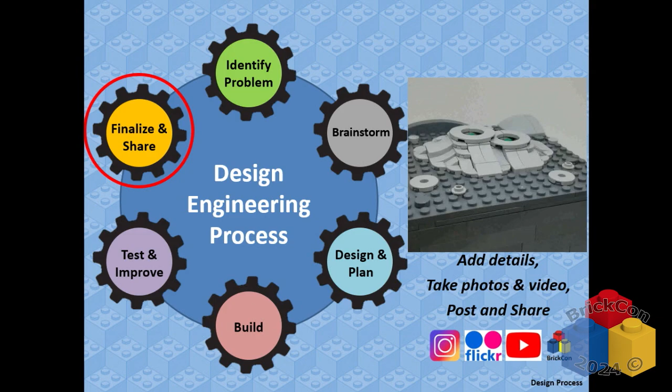Okay, so there's a design process. It's not scary, just one step at a time. What do I want? What are my limitations? How could I do it? Which way do I want to do it? Okay, let's try that, and if it doesn't work, go back to your brainstorming session. Well, what was one of the other ways I thought about? Maybe I'll try that, try a different way. It's easy... it was not easy. It's not easy, it's painful sometimes, but it's a good process. That's kind of cool.

All right, power options. Anybody do power? Oh, okay, cool, I got the 10-minute warning. Okay, we're doing good, okay sweet. I saw it, which is good.

These are all the Lego power options. I don't think I missed anything. Lots of them throughout the years. Some of them are very old, but they still work, they're still usable. Some of them are very new, and you could work with them, I suppose.

I'm very, very, very hooked on the power functions and the EV3. That's my babies right there. Everything else, meh.

But if you want to do programming and make something move with a specific intent or function that's controllable through sensors or through timing, or move this direction and then move the motor the other direction, you can do that through programming. You can do it mechanically as well with some gears, but you could also cheat a little bit and do programming, which is really nice.

My plasma ball, anybody seen the plasma ball down there? It's programmed to spin one direction at a random time, for a random amount of time, in a random direction, at a random speed with parameters.

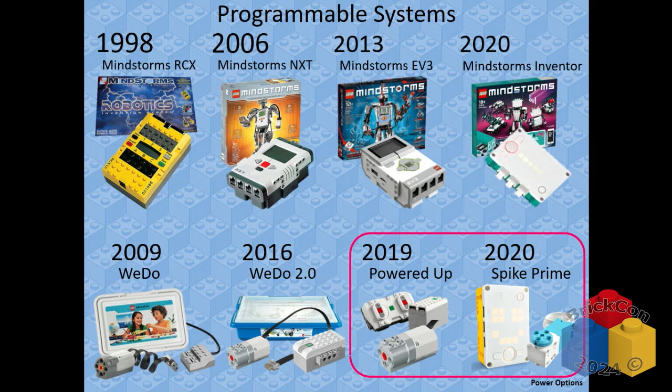I'll do a talk on it sometime if you want. Powered up, I've never used the app, but I use the system with just battery, and you can turn it on and off. Or you can get an app on your phone and do some little programming on your tablet or whatever you use. Don't do it on your TV, that'd be weird, I don't know how that works.

Okay, so power options, pretty easy. I hope so. More knowledge. What else we got in here?

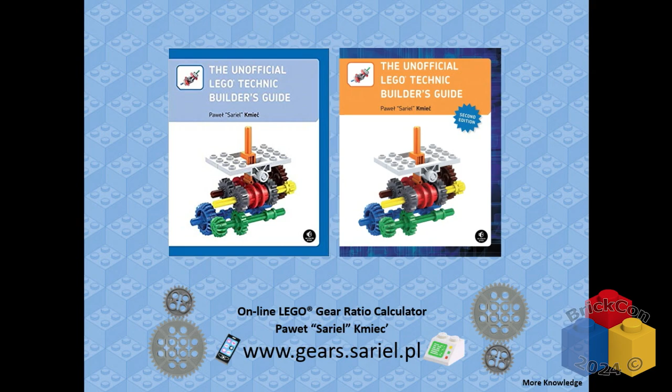Anybody seen this book? Oh man, it's like the gospel, I swear, it's good stuff. Good stuff in this book. Sariel makes amazing things, does amazing books, and he's got a great website with lots of good resources. That chart that I showed you that had all the gear ratios, it's on his chart. It's on his website, you can pull that off there. So that's easy to get to.

He's got some references on there where online it'll have an array of Technic holes. You're like, well, I want to use these two gears, where would they mesh? And it'll show you where they go. Or I want to use these two gears, what's my gear ratio? And do a little calculator and show you in there. Did find one little error in there that wasn't quite meshing right, but mostly it's a good reference. Build it before you test it.